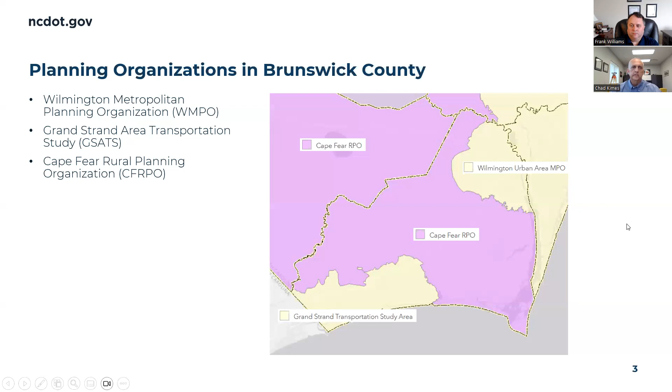But first of all, the 3 MPOs and RPOs in Brunswick County are the Wilmington Metropolitan Planning Organization, the WMPO. You can see this one highlighted here. You will hear me say WMPO the rest of this presentation. Just remember that's the Wilmington Metropolitan Planning Organization. We also have the Grand Strand, which is out of South Carolina, that covers a portion of the area. They basically cover Calabash, Holden Beach, Ocean Isle Beach, and that general area there. The rest of the area is covered by the Cape Fear RPO.

So here are just some differences between the MPOs and the RPOs. For the MPOs, it's an urbanized area that's got a population greater than 50,000. The MPOs are mandated by federal law. You will see here in a few minutes why that is important. A large portion of our funding comes from the federal government, so this is why that is developed by federal law. They are required to maintain a metropolitan transportation plan. I will be using the acronym MTP a lot during this presentation, but just remember that is their long-range 20-year plan out of the MPO.

That one does have to be fiscally constrained, so they are given a proposed budget within the 20 years. That doesn't mean the money's there, but they are given a dollar amount that should be there based on the current revenues. And then the main part of that is to identify projects and be able to put them into that MTP. In North Carolina, there's 19 MPOs. Brunswick County has 2 of those 19.

RPOs, the main difference between the MPO and RPO is it's not federally required, but North Carolina stated that they also wanted those areas not under an MPO to be covered, so it's mandated by state law. They also do a comprehensive transportation plan. We call that a CTP. This one is not fiscally constrained, but it's close. It's very similar, held to the same as the MTP. And once again, it's identifying needs in the state for the next 30 years. Currently in North Carolina, there's 20 RPOs, and Brunswick County has 1 of those 20.

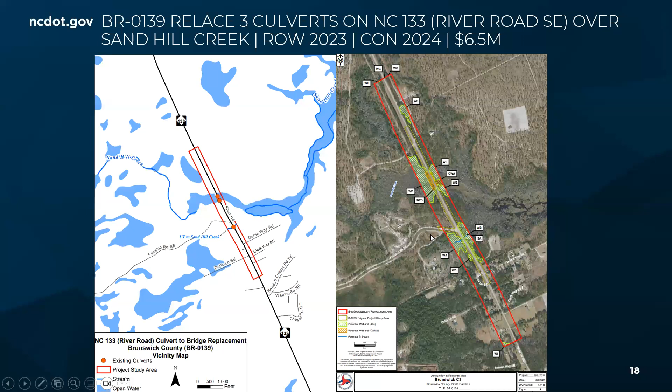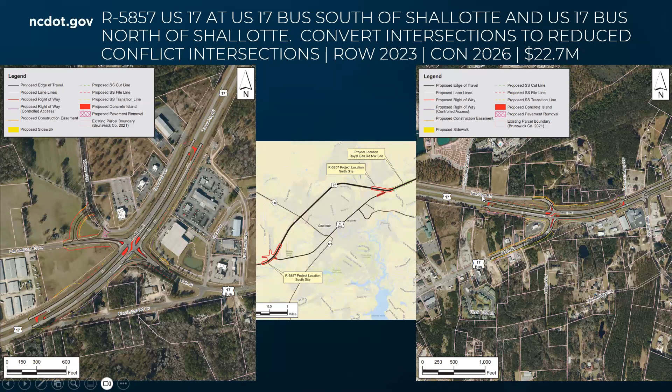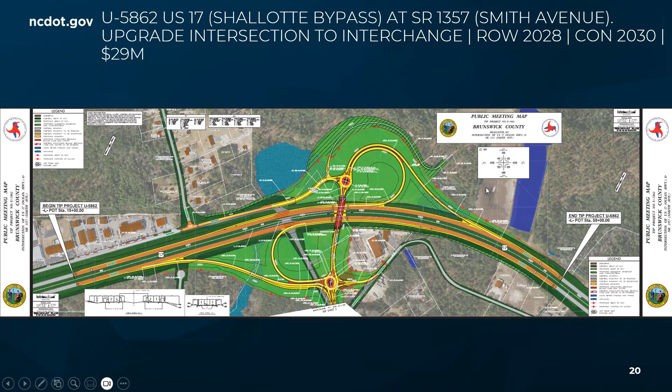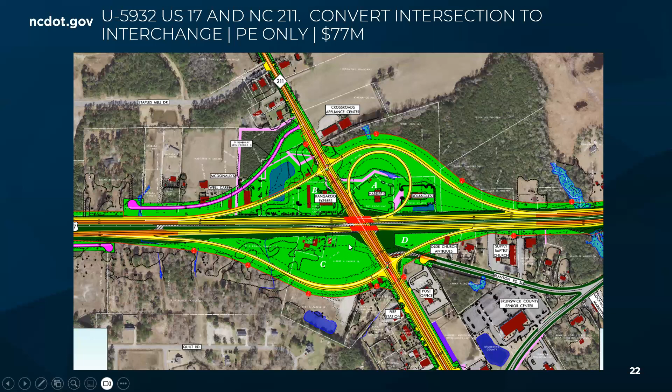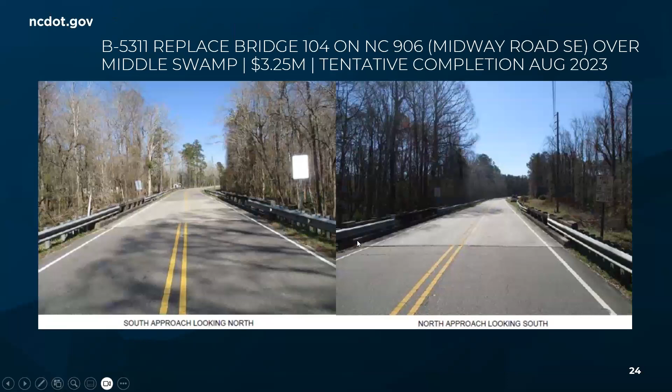All right, projects under construction. This is the one I really didn't want to talk about today, but we will. Midway Road Bridge. So the contractor is trying to wrap this up. I'll give you the latest and greatest that came in just right before this presentation. They're having some issues with some of the slopes out there. They hope to have this addressed by Friday.

Let's keep our fingers crossed that this is opened up by the end of the week. We're putting as much pressure on the contractor as we can. We do have liquidated damages for every day he does not have this bridge open, which is charged against the contractor, that we will recoup.

But the most important thing to know is we know that this is a critical route for Brunswick County. All of us use this route. If there's an evacuation for a storm, it's got to be used, but we are pushing as hard as we can. So hopefully we will have this open by the end of this week.

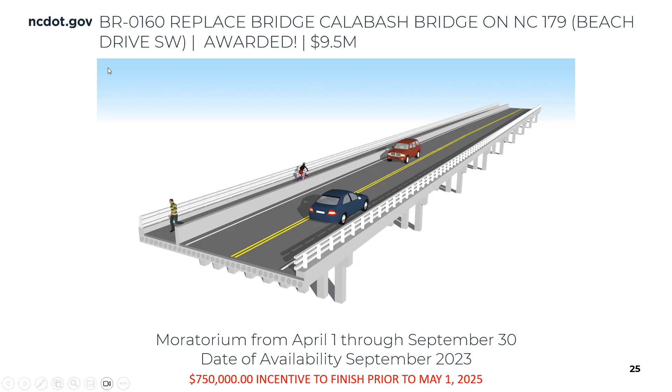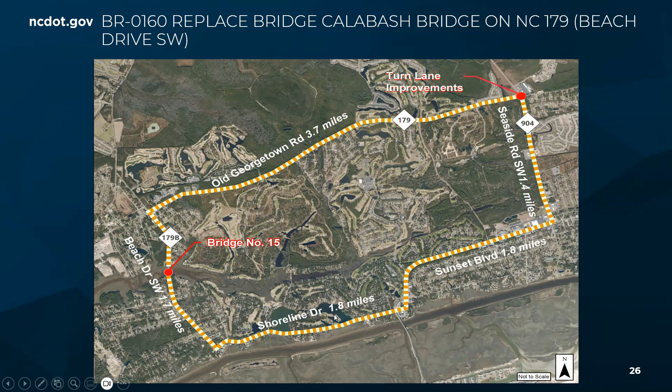This is the detour. Not going to go into too many details. We do know it will inconvenience, especially the folks in this corner of Shoreline right here. We have coordinated with the fire departments, EMS. They have restaged, so their response time is basically the same in case there are emergencies. But like I said, there is strong coordination between the county, the towns, whether it's Calabash or Sunset Beach, and the emergency services for this detour.

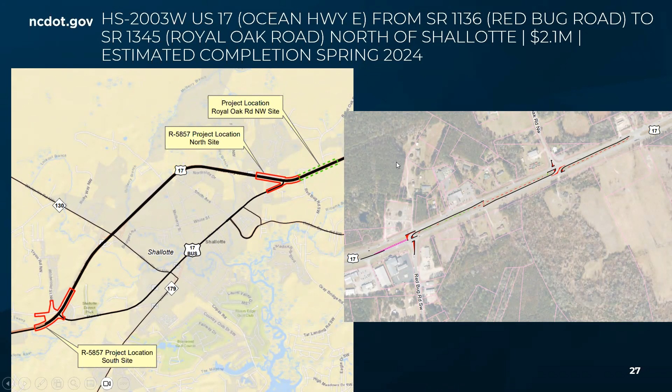This one real quick is just another one of the super streets just north of Shallotte. This is at Red Bug Road. Don't know if many of you go to the charter school in that area, but this one is under construction, and just want everybody to be aware of that one.

This project here is located, and this map really doesn't show the new Belville Town Hall where it's located, but this is a project we just had a ribbon cutting on last week. These are improvements to River Road leading up to the Divergent Diamond. Basically, this will allow more storage going into the Divergent Diamond, but most importantly, it also provides a multi-use path from the gas station down past the town hall, which will tie into their existing boardwalks that they have along the river. So it allows us a little bit more capacity going into the Divergent Diamond.

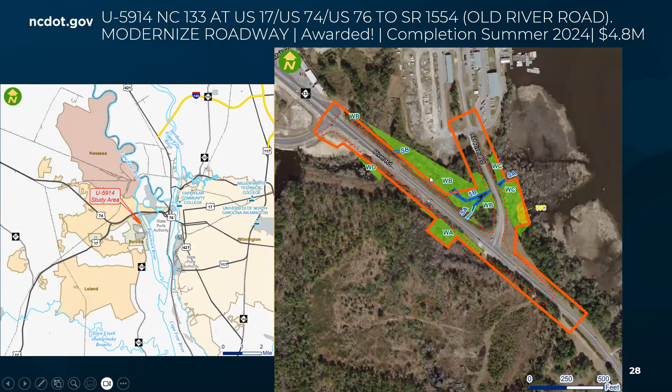NC 211. It's one of my favorite projects. Like I said, this is one of our priorities. The project that is under construction basically goes from 87 and Southport back to Midway Road, and it's about 8 miles long. And this was awarded for a little under $220 million. This was the largest let project ever in this part of the state, and one of the largest ever in the state of North Carolina. It is a massive undertaking going from a 2-lane to a 4-lane with this amount of development going up in that region at the same time.

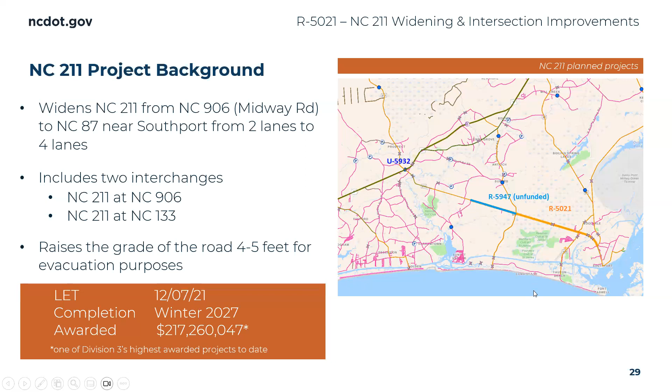There are huge utility upgrades. Water and sewer is getting upgraded as part of this project. That's been going on for years. We started working on utilities several years before the construction started. So excited to get this one kicked off. There are 2 interchanges in this project. And once again, this was to assist with evacuations for storms.

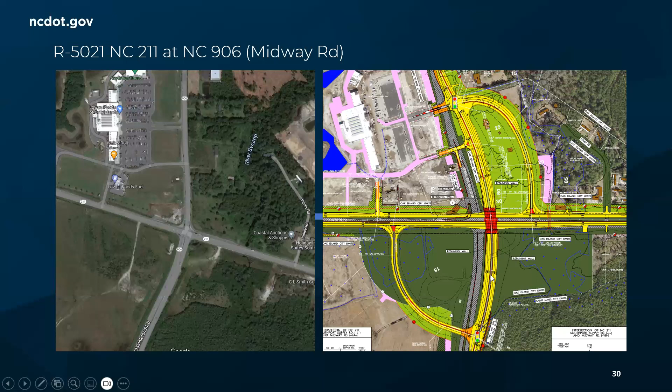The first one is here at Midway Road or at Middleton. Basically, as you see here, Middleton and Midway will go over 211, and that is so it does not interfere with traffic on 211. All these designs you're getting ready to see were to reduce all the impacts to the existing businesses that were in place there. And that's a good thing, especially on this next interchange. I don't know how we finally figured this out, but we had very little impacts to all of the existing businesses that were in this footprint. But this is, of course, the Long Beach Road. This will also be flying over 211, free flowing, to separate traffic from 211.

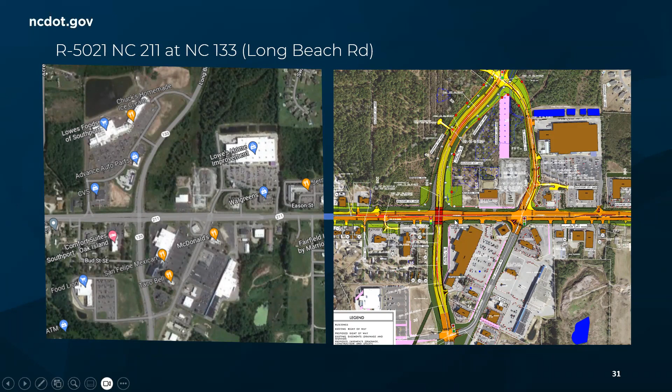And this picture right here on the right side of your screen is what 211 will look like. Keep in mind 211, because of the flooding issues, we are overall raising the roadway 4 to 5 foot on average. You are seeing this as they're currently building this section over here on the west side. You can see how much higher that's taken shape out there. This picture on the left is a couple months old. The bridge fills are in. You're going to start seeing a bridge being built over here shortly. But this project is moving along.

Once again, we have strong partnerships with all the communities along this corridor, with St. James, Oak Island, Southport, Brunswick County. And I can't state enough how important those partnerships have to be for a project like this to be successful. Once again, this is a massive project.

We generally do not see them on this scale. Yeah, we have one question that I think is pertinent to this. It says, will that be increased to 4 lanes with the flyover? And I'm assuming that's referring to this. Cheryl, if it's not, if you can add a clarification in the chat.

No, that was on Long Beach Road is what she was talking about, I guess. By the time it got entered, we were on this slide. She's wondering if it's where Long Beach Road, where you were talking about previously. The question was, will it be increased to 4 lanes with the flyover? Long Beach Road itself will continue with the same traffic pattern as it is today. Okay. And Cheryl, if you have any other questions, put them in there and we'll get them.

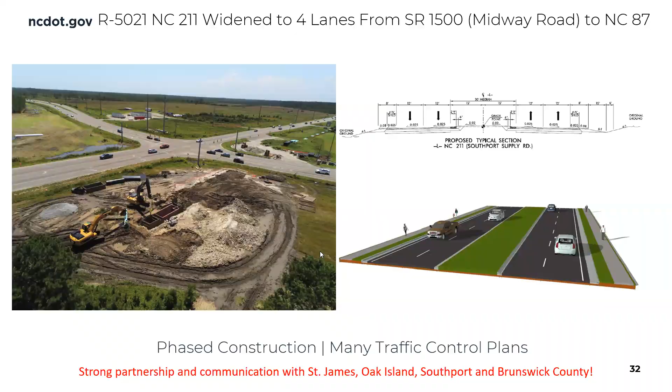All right, another project that is under construction that we've run into a couple of hurdles with is down at Hickman Road, US 17, the southern part of the county, which is our cut through down to South Carolina. Everybody noticed all the barrels sitting out there and no work going on. In my career, which has been about 30 years, we've only had 2 contractors over that span go bankrupt and walk off the project, and this was one of those. Typically in years past, you go back on the bonding company, you end up having to relet the project. It takes about a year and a half to pick back up on it.

In this case, we were very fortunate. We were at a point where we were really down to just a little bit of curbing work and mainly paving work. So one of the subcontractors, who is one of our main paving resurfacing contractors, was able to work out a deal with the bonding company, and they took over this project, which actually sped things up a lot. Our new completion date is by the end of October on this project. So hopefully that's some good news. If you've been out there in the last week, you should have seen them out there working, but they are back working on this project.

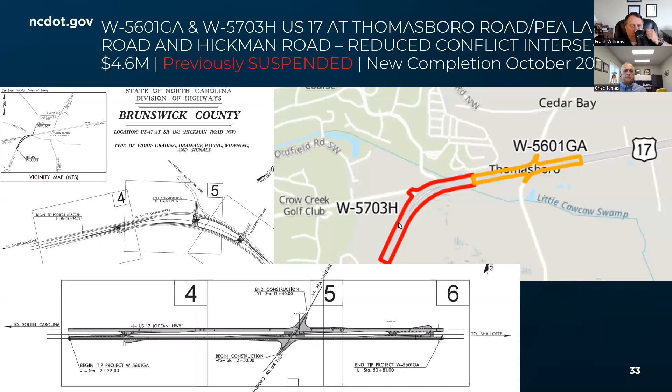And this is another one of those areas too, the Hickman Road, US 17, when you speak of fatalities, there are multiple fatalities at that location. And these are just some drawings I'm not going to go through. We're getting familiar with a lot of these super street designs.

So looking to the future, what are some of our top priorities? The first one here is Cape Fear Memorial Bridge. I'm sure most everyone has heard a lot of conversations on this. So I'll just give you a little bit of background. It is over 50 years old now. We're down to 3 movable spans in Southeast North Carolina. At a point on movable spans, the maintenance costs start to be so high, you've got to go ahead and start looking at replacing. We've got numbers here that talk about our costs, but basically your lifespans start reducing because you have to do major rehab to keep increasing your lifespans. So our movable spans are down to a 10-year lifespan, fixed span 20.

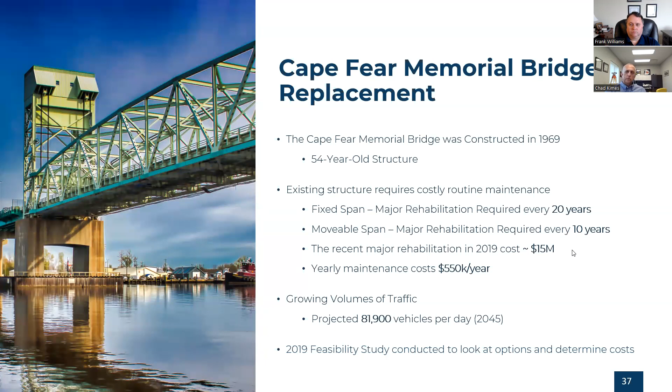This bridge is expected to carry 80,000 cars a day here shortly. It's already pushing 70,000 cars. It's increasing rapidly. Our state ports are growing. We're having more tractor trailers on it, so it's causing a lot of additional issues. So this will be the first group I have shown this to, speaking of maintenance costs. I told you it was supposed to be 10 years before our next major rehab. We actually are only going to make it about 5 years. And I'm going to show you some pictures of the existing deck out there. But because of the additional traffic, we're having a lot of failures on the bridge.

Our shims are breaking, our stringers are fracturing, which is causing a lot of these plates to pop out. We're actually out there working on a lot of nights, re-welding these parts. But we do have to replace this whole deck, this riding deck, this coming winter. And we're currently putting this contract together.

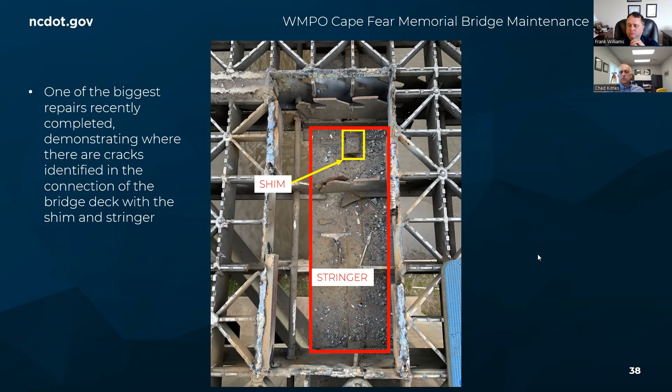It is going to have some major traffic impact in the region. We will have to shut down a direction at a time for several weeks at a time, but we have to get this deck right. And this just shows before, after we cleaned it out, and after that's a temporary repair until we get the new deck on here.

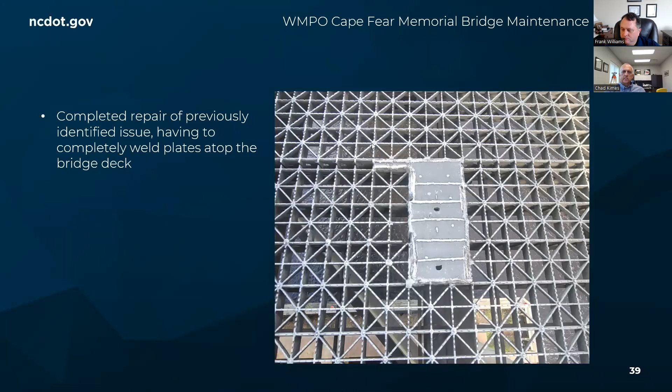And this, you can actually see some of the failures in the deck. You can see it in the stringers. You can see over here where a shim, and a shim is to help the rideability of the deck. When you go across it, you may have noticed how it's kind of bumpy. These shims reduce how bumpy it gets, but when the shim breaks, typically the stringers break as well too.

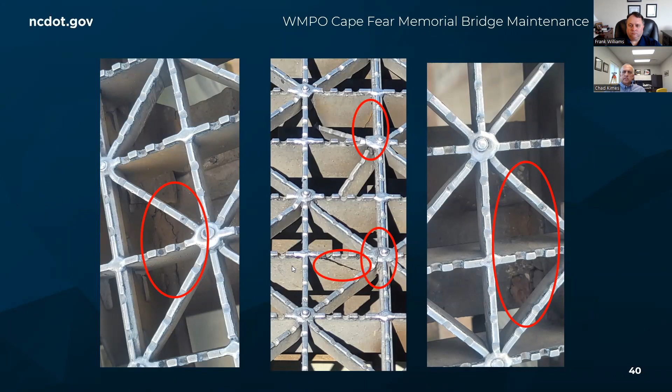Like I said, these are new pictures that we're starting to release, and this is the first time I've shown these pictures to anybody, just so we can start getting an understanding of what's going on with the deck right now. This is typically what happens when they go out there in the morning. They can see a section missing.

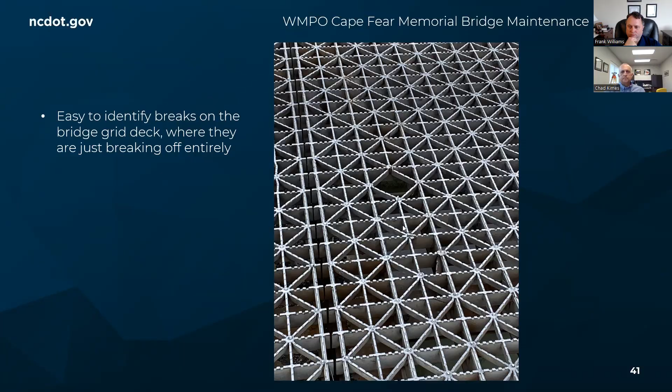All right, so let's get back to replacing the bridge, which is our priority. We kicked off a high-level look on how to replace this bridge. Basically, it has to be replaced. All options are replacing it right adjacent on the south side. We cannot go to the north side because of the historic side of Wilmington. But basically, we're concentrating on a 135-foot fixed span or a 65-foot fixed span.

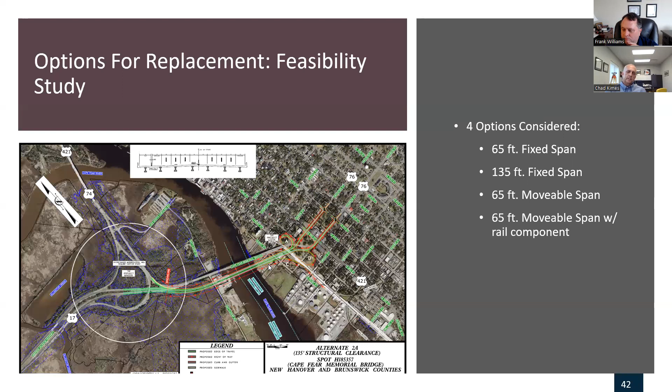Today, when the bridge opens into the open position, we have 135-foot clearance. So that's the reason why we are looking at the 135-foot. The Coast Guard approved that clearance years ago, and they more than likely will want to keep that clearance at 135. This will be what the bridge will look like from a typical section. Basically, we will be going from a 4 to a 6 lane.

Note over here on the side, there is no connectivity between Brunswick County and New Hanover County for people walking or riding a bike. We want to be able to make that connection. I could see this connection eventually making it down to Belville and tying into their walkways, and also making it out to the battleship. But anyway, increasing the capacity a lot with this design here.

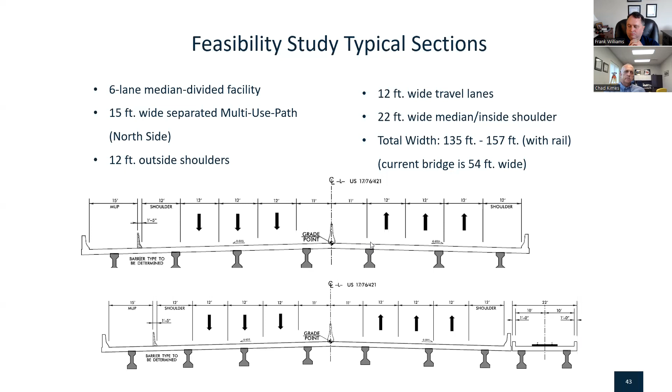Now we're going to go back and kind of look at the cost of these options. Basically, when you're looking at a 135-foot span, you're looking at about a $400 million bridge. In comparison, think about what I just showed you earlier on Calabash. That was about a $10 million bridge, and that's a pretty big bridge in Calabash. The bridge in Surf City, that was the last major high rise we built. That was around a $60 million bridge. So we're looking at $400 million to replace the Cape Fear Memorial Bridge with a 135-foot clearance.

We did submit this into our prioritization process like we talked about earlier in our last round of prioritization. I'm not going to get in numbers too much, but we were about 20-some billion dollars difference in projects and getting it scored. So when you're competing against all the projects in the state, there was about $20 billion of projects that were scoring better than Cape Fear Memorial Bridge. So hence we're having a few funding challenges.

We are working with the WMPO and that planning organization on looking at all options. We're looking at options such as federal grants to help offset some of that cost. Typically, let's say if we can go out and get a $200 million grant, which will bring the overall cost down by $200 million, this will score a lot better in our prioritization process. That's just one of the things we're looking at.

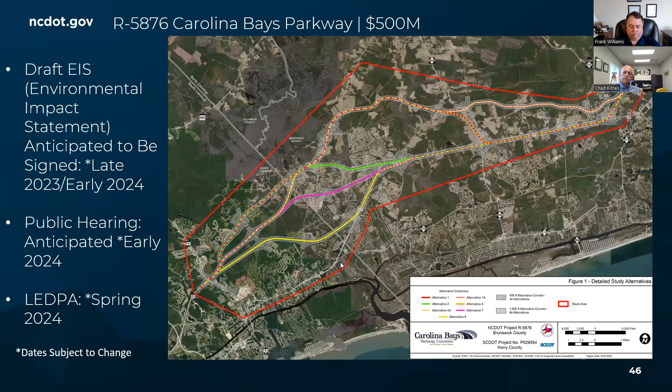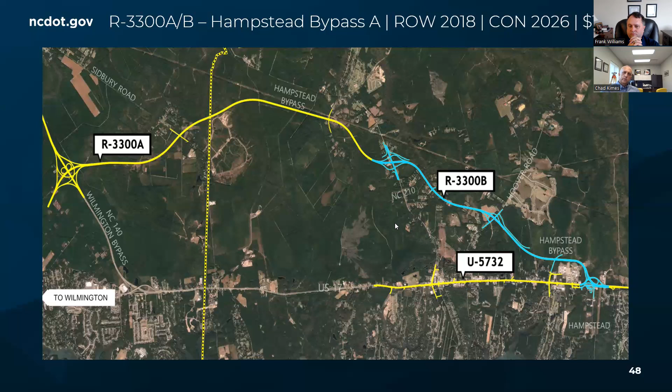And lastly, on a couple other projects, these are not in Brunswick County, but I just want to point out they do affect Brunswick County, but Hampstead Bypass, which is actually in a portion of the Cape Fear RPO. A portion of that is under construction. And all of the Hampstead Bypass will be opened up before 2030. We'll have the first section open by 2026. And I'm not going to go into details on this just because we're sticking in Brunswick.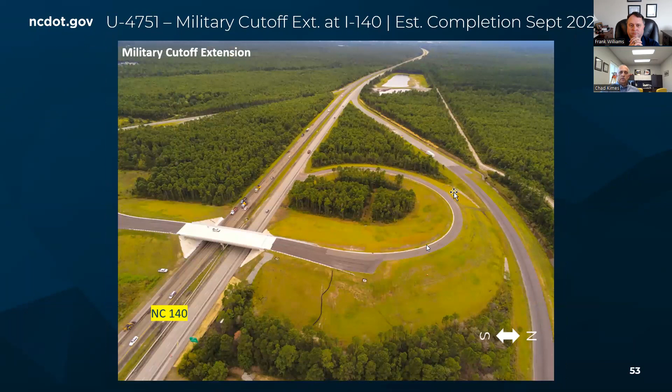And then I've got some real exciting news that's actually in New Hanover County. We will be opening up the new Military Cutoff extension in September. And these are just some pictures. Like I said, I'm not going to spend any time showing this, but this will be a new 4-lane, 6-lane facility from Market Street up to I-140, which will tie into Hampstead and which technically will have connection to Brunswick County.

I will tell you, yesterday, I had a doctor's appointment in Leland. I live in Surf City. I will be able to get to a doctor's office in Leland quicker than I can to the hospital in Wilmington when all this opens up. So that's the reason why I wanted to bring this up, because it does have a connection to Brunswick County.

So with that, I'm out of breath, Frank.

Well, thank you for covering all of that, and I will start going through the questions and let you handle those. A couple of them are related to things you talked about. And the first one is with regards to the culvert and bridge project on Highway 133 at Funston. How long is the projected project duration? And I think by extension, how long would you expect 133 to be closed? And I'll add a question. What do you think the detour would be?

Good questions. Typically, we'll keep that closure down to a year, if at all possible. We typically do not want to go through more than one summer season. We try to do it in the off season, depending on the size of the bridge. What I will do, Frank, we will send you, if we've got those dates yet. I'm not sure we'll have those dates yet, but we'll send you a detour too, so you can post.